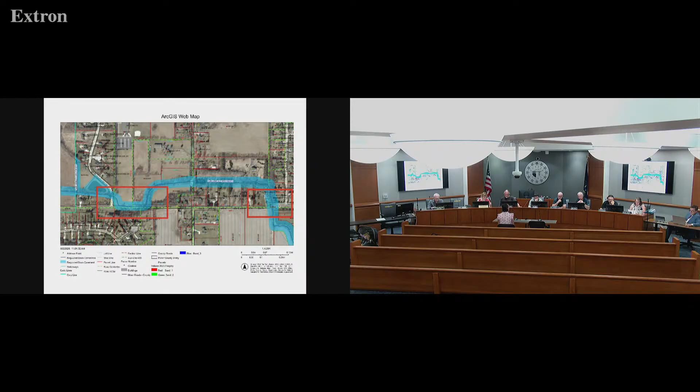The work will include installation of a new 2-inch Duraline Future Path 4-way conduit via horizontal directional drilling. They are proposing to install the conduit on the north side of County Road 400 North from Meadowbrook Drive to County Road 325 East, running parallel with Flint Lake Garden Terrace ditch, which is an open drain. That portion of the project will be within the regulated drainage easement for approximately 620 feet.

I would like to note that it's difficult to discern the location of the fiber optic utility in relation to Flint Lake Garden Terrace ditch. If the proposed cable is to be installed along the center line of the ditch or under Flint Lake Garden Terrace ditch, then the cable shall be installed with a minimum of 5 feet separation from the invert of Flint Lake Garden Terrace ditch. If the proposed cable is to be installed along the top of bank, then the cable shall...

...be installed a minimum of 5 feet south of the southern top of bank to provide adequate cover from the side slopes of Flint Lake Garden Terrace ditch and to prevent conflict between the proposed cable and potential stream bank repairs. Additionally, a handhole will be installed between Meadowbrook Drive and Flint Lake Garden Terrace ditch, approximately 40 feet from the center line of ditch of Flint Lake Garden Terrace ditch.

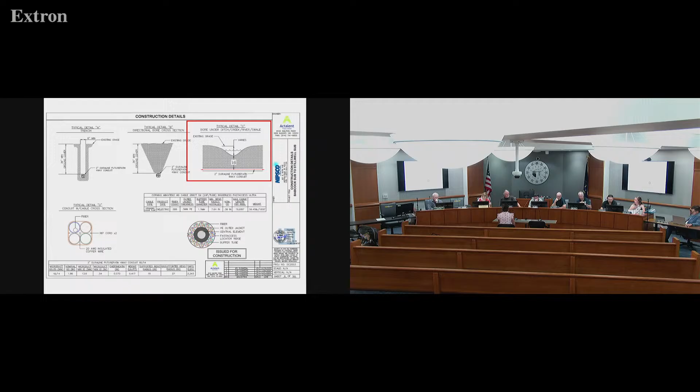The next location, the applicant is proposing to place a new conduit on the south side of County Road 400 North. Melissa, if you go to the previous slide please, which is the Plan View B on the bottom of your screen. So they're proposing to install that conduit on the south side of County Road 400 North near 349 East 400 North, and they'll cross Flint Lake Garden Terrace ditch with a minimum of 5 feet separation from the invert to the cable. As shown on the erosion control plans, temporary perimeter sediment control will be installed around the work area to prevent sediment transport to Flint Lake Garden Terrace ditch.

At this time, staff recommends approval of the 2-inch Duraline Future Path 4-way conduit within the regulated drainage easement associated with and crossing Flint Lake Garden Terrace ditch. The standard terms and conditions apply, including execution of a hold harmless agreement. In making an application to conduct the proposed work, the applicant has agreed to restore any disturbance to a condition as good or better than that found prior to the commencement of work.

Staff also recommends the following special provision be applied to this project: contact the department at least 72 hours prior to the start of work within the regulated drainage easement so that staff may be present during the performance of the work. Staff notes the applicant will need to obtain a permit for any work conducted within the road's rights of way. And that concludes my staff report.

Any comments? Will the cable be installed under Flint Lake Garden Terrace ditch along that portion between Meadowbrook Drive, the eastern portion, the western portion of the work, or will it be along the top of bank? Do you know? I believe it's underneath. Which I don't have an issue with, if it's at that 5 feet separation. Yes. Yeah.

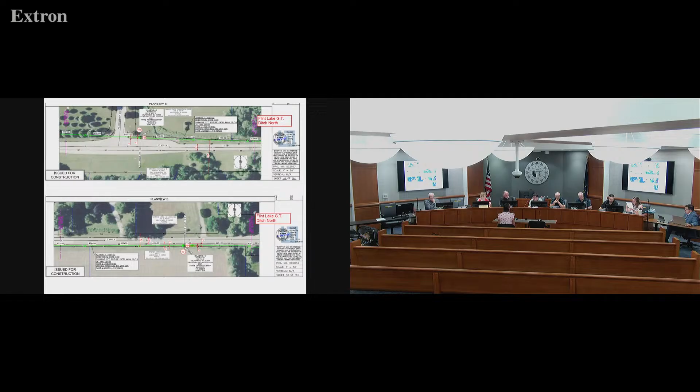Right, the intersection of 400 East in State Road 2. So this one is crossing Hutton Ditch Arm 2. If you go to the next slide, please, Melissa.

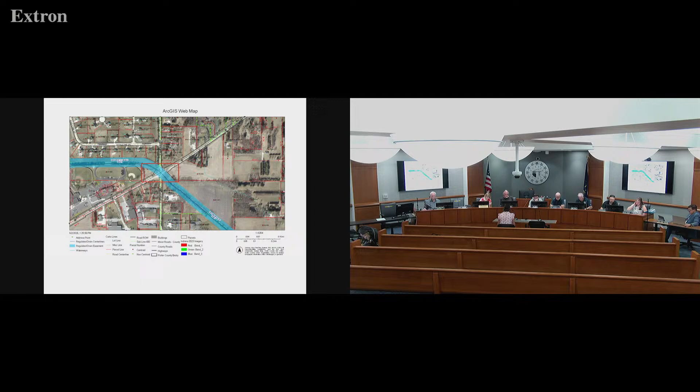You'll see the area on your screen where they are proposing to conduct the work. If you go to the next slide, please. You'll see that they are proposing to install this fiber optic utility on the east side of County Road 400 East and the north side of State Road 2. And a portion of this work will be in the regulated drainage easement associated with Hutton Ditch Arm 2. Staff it doesn't appear that this work will impact the regulated drain or cross the regulated drain, but a portion of it will be within the regulated drainage easement.

Additionally, no handholes or those receiving and jack and bore pits will be located within the regulated drainage easement, so there'll be pretty minimal impacts as far as disturbance, but that utility will be within the regulated drainage easement associated with Hutton Ditch Arm 2. So staff recommends the approval of the installation of the Duraline Future Path 4-way conduit within the regulated drainage easement associated with Hutton Ditch Arm 2, including the standard terms with the execution of a hold harmless agreement and the same special provision that the applicant contact the department 72 hours prior to the start of work within the regulated drainage easement.

Do you have any questions? I do not. Any comments? Questions? Motion? I move that we approve SM-26-00009. Second? I'll second. Pass.

Now we go to 0010. We didn't vote. We didn't do it all. We didn't vote, I'm sorry. Mr. Chairman, procedurally, you should do it all in favor or opposed. Yes, sir. All in favor? Aye. Opposed? Thank you.

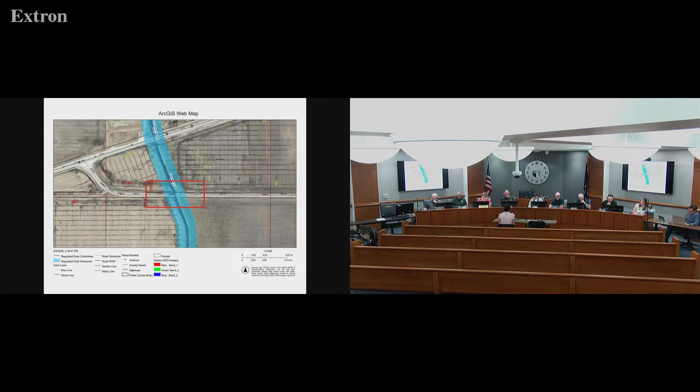Questions? Comments? I move that we approve SM-26-0010. Second. All in favor? Aye. Opposed? Passes. We go on to the next one, 260011.

I would like to make a note for the record, Councilman Vasquez has joined the meeting as well. Present. So this docket number, NIPSCO is proposing to install the fiber optic utility along County Road 400 North, approximately 3,300 feet east of County Road 575 East. They will install that new fiber optic utility under Crooked Creek, which is an open drain. It will be conducted via horizontal directional drilling on the north side of County Road 400 North, with a minimum of 5 feet of separation distance between the invert of Crooked Creek and the new fiber optic utility.

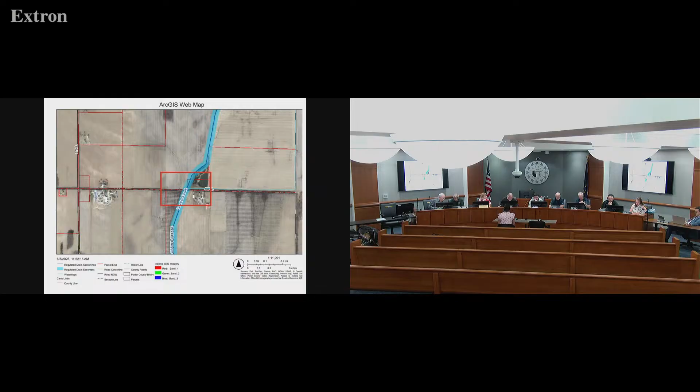Staff recommends the approval of the installation of the 2-inch Duraline Future Path 4-way conduit with the standard terms and conditions, including the execution of a hold harmless agreement and the following special provision: that the applicant contact the department at least 72 hours prior to the start of work within the regulated easement.

Questions? Comments? I got actually one question, and this is for all of them. Is NIPSCO actually doing the boring, or do you have a contractor? We will have a contractor. So does the contractor have to be noted here, or no? They do not need to be noted in the engineering plans, but when we send out our environmental compliance plan, all of these factors are included in that plan, and they have to sign off on that, saying that they understand the rule. Can you just explain what you're doing in the area, just so we have context?

Sure. So one of the key things that we do to increase reliability across our substations is connect them with an underground fiber route.

There is almost an underground fiber route connecting all the substations, or will be by 2028 likely, depending on project variation. The goal is so the substations can communicate with each other, so if there's ever an equipment failure, a different adjacent substation can pick up the feed so customers do not lose power.

They're closed systems, so only NIPSCO is able to contact each other. There's no outside source; nobody else can get this feed. One of the reasons we install the 4-way conduit when we put it in is so that if there's ever another project or we need to tie in, we don't have to run an entire new line. We can borrow one of the other three slots.

How do you communicate with the substations now? The microwave towers. So it's more for security? Yes, it's definitely more secure, but part of the FERC licensing does require reliability, so that's part of the operations as well.

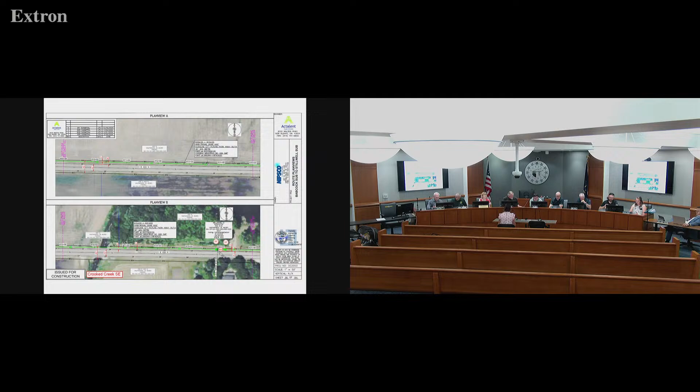And now we're down to 26-0012.

So this one is different. The applicant is NIPSCO. They are proposing to retire an existing gas main and install a new 6-inch plastic gas main under Phillips Ditch, at the intersection of State Road 8 and County Road 150 West, to accommodate the State Road 8 small structure replacement project. The applicant is proposing to place one new gas main under Phillips Ditch, an open drain, to accommodate the recently approved INDOT small structure replacement project carrying State Road 8 over Phillips Ditch.

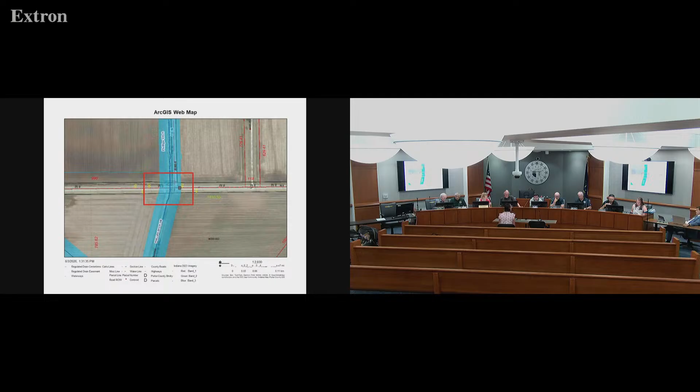The work will include installation of a new 6-inch plastic medium density polyethylene medium pressure gas main via horizontal directional drilling. The applicant is also proposing abandonment in place of the existing 3-inch plastic gas main within the regulated drainage easement. A minimum 6 feet of separation distance between the new 6-inch gas main and the proposed reinforced concrete box structure will be provided per construction plans. The jack and receiving bore pits will be located outside the regulated drainage easement.

At this time, staff recommends approval for the abandonment in place of the existing 3-inch gas main and installation of the proposed 6-inch gas main under Phillips Ditch and within the regulated drainage easement. Standard terms and conditions shall apply, including execution of a hold harmless agreement between the applicant and Porter County. Staff also recommends the following special provision: contact the department at least 72 hours prior to the start of work within the regulated area. That concludes my staff report.

Any questions or comments? The existing 3-inch, what does that abandonment look like? Does it get cut, purged, capped? Yes, they will cap it in place.

They do testing on all the abandoned pipe also to make sure it's not... I forget what's in there, contaminants sometimes they can be in, like, very old pipes, so they test them all first. Do they move the pipe or just leave it there? They will remove it if it is contaminated. Otherwise it just stays in the ground.

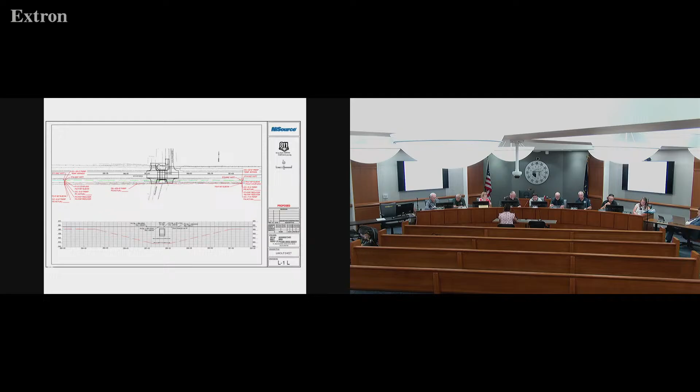I move that we approve SM-26-0012. Second. All in favor? Aye. Opposed? Okay, and finally we have SM-26-0013. So the applicant is NIPSCO.

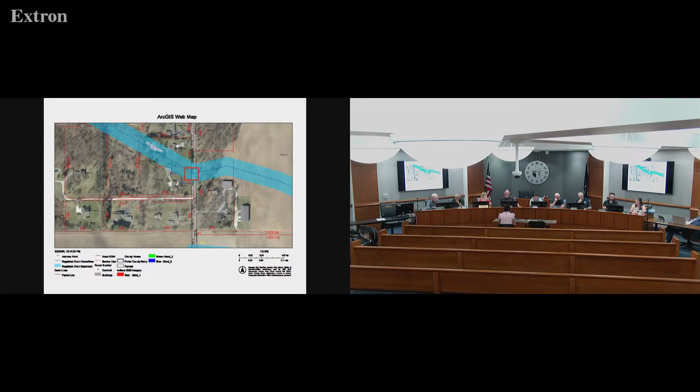They're proposing to retire and replace an existing utility pole and as-needed tree trimming crossing Ludington Ditch Arm 16 along County Road 200 West. The particular project location nearest address is 394 South, 200 West. The applicant is proposing to retire and install one new utility pole on the west side of County Road 200 West within the regulated drainage easement associated with Ludington Ditch Arm 16, which is a closed drain or a drain tile. This is a part of the TDSIC PRP Valparaiso Pk17 D13 utility improvement project.

Construction access to auger the hole and install the new pole will remain from County Road 200 West. Pole 441-084 appears to be located north of Ludington Ditch Arm 16, which is a 12-inch vitrified clay tile or VCT drain tile. The proposed pole placement is approximately 2 feet south of the existing utility pole location. Any damage to Ludington Ditch Arm 16 caused by the installation of the new utility pole shall be repaired by the applicant.

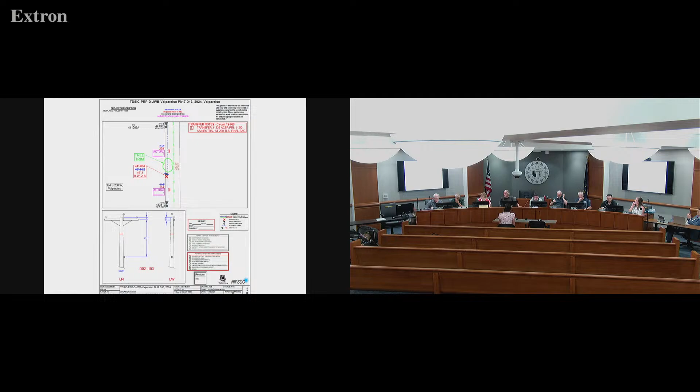Melissa, if you could please go to the previous slide, sorry. So that little darker blue line that's in the center of the blue shading, that's the center line of easement. Staff has done some drain tile flagging in this location, and the drain tile does fall fairly close to the center line in this location. So we don't foresee any conflicts, but just noting that if your pole location changes or if you do encounter the drain tile, please contact us and NIPSCO will have to repair that drain tile.

Okay. Would you like to see potholing ahead of time for this project? I don't think it's necessary, not with us knowing where the drain tile is. Okay. And I also don't think that would really be practical for your scope of work to pothole where you're going to auger the hole. So it might compromise the integrity of the utility pole.

Staff recommends the approval of the removal of the existing utility pole and installation of the proposed utility pole within the regulated drainage easement associated with Ludington Ditch Arm 16. The standard terms and conditions apply, including the execution of a hold harmless agreement. Staff also recommends that the following special provision apply to the project.

Contact the department at least 72 hours prior to the start of work within the regulated drainage easement. And staff notes that you'll also need to obtain a permit for any work conducted within the road right of way. Yep. And that concludes my staff report. Any questions or comments? I just have a general question. What necessitates having to retire an existing pole and replacing it with something new?

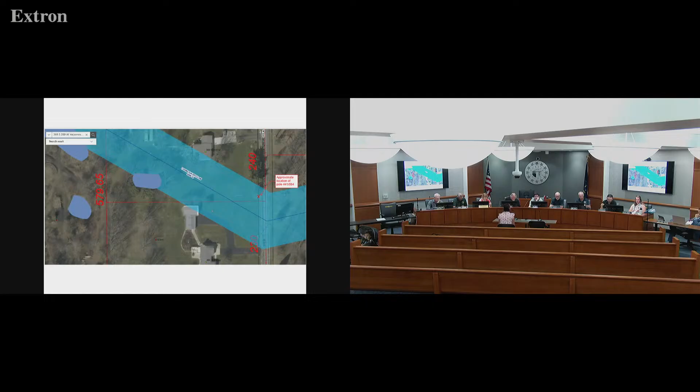Any questions? I move that we approve SM-26-0013. Second. All in favor? Aye. Aye. Opposed? Okay, that one passed. So I guess all that's left is the manager's report.

Yeah, and Rachel, all these cases will be presented to the Stormwater Management Board at their meeting on June 23rd at 9 a.m. You're welcome to attend, but it's not required. And the hold harmless agreement will be sent to the project contacts following that meeting.

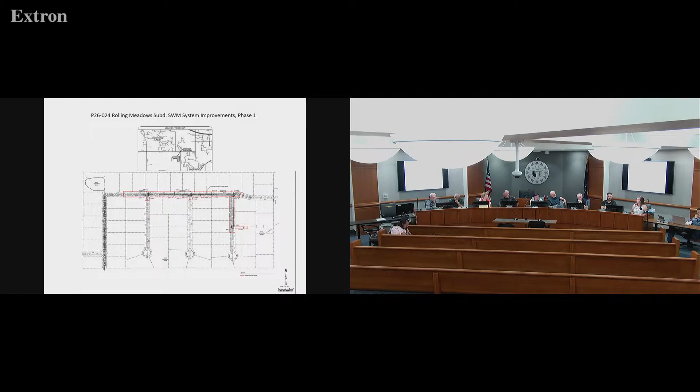Garriott Construction is the contractor. So far, the work has progressed well. And then we have Burke Engineering on site. They were the engineers of record and designers, and we have part-time construction observation with them. So, so far things have been going well. So I will knock on wood that way.

What's the estimated life of a system like this? 50 years is what they say, but I think 100 would not be unreasonable. And we are doing our standard bedding and initial backfill. So underneath the 30-inch pipe is 6 inches of bedding, and then the minimum bedding as we go to the 12 inches, 3 inches, and then 1 foot of number 8 stone above the top of pipe, and then backfill with 53s, and then our asphalt. So a nice stone envelope surrounding the pipe, which increases the service life.

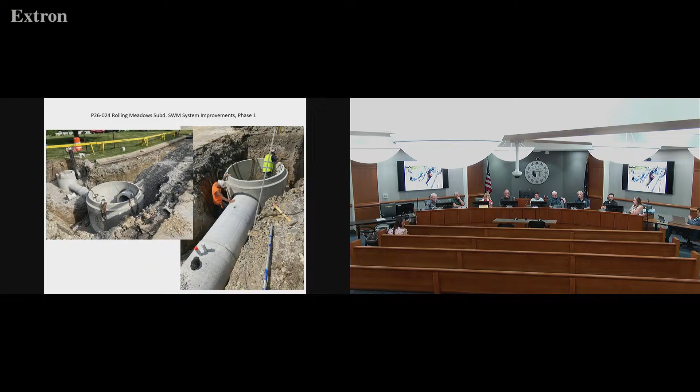And then we are using this as a joint project with the highway department as well. So our stormwater portion of the work, where we disturb the pavement, will be paved to the intermediate course. And then the highway department is going to come through and mill and resurface the remaining streets, and then place surface on our portion of the work as well. So that's a cost savings for us out of the stormwater fund, and working with the highway department to team up on these type of projects as we go through this. And with that, that concludes my program manager's report.

Okay, any discussion? Sounds good to me. The next meeting is July 13th this year, and it's at 5 o'clock as usual. Recess. We need a motion there. I don't think we need a motion to adjourn. I have the motion to recess. You can, I know Scott's. Okay, I didn't realize. I can motion it. Technically, the chair's not supposed to make one. Oh, I see. Yeah, motion to adjourn the meeting. Second. July 13th. Okay, then all in favor?